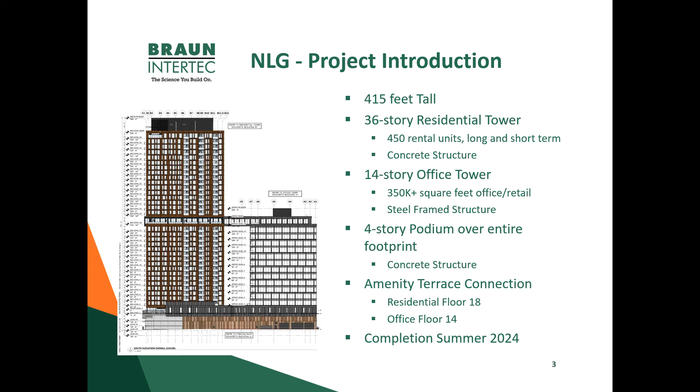Project team: the owner is Hines. For those of you who aren't familiar with Hines, it's Hines with an S, not the ketchup moguls with a Z. They are a very large global developer, in 30 countries worldwide, one of the largest in North America. I think I saw they have 160 billion dollars of real estate assets in North America alone. So they are a very big entity. They're not as big in this market, but they're a pretty big time player on the global scale. This is their third project in the cities. They bought a huge piece of land and this is their third building on that site.

Architect was ESG, structural engineer was WSP out of Chicago, civil engineer was Loucks, general contractor was Kraus-Anderson. Foundation contractor was Bolander, concrete was done by Northland. The post-tension concrete on the residential tower is Kelleher, and the steel erector is Ames. So just kind of an overview of who all was involved, who built the thing. Really good A-team, makes a project go really well when you have a team like this involved.

Our services performed: we started working on this job in 2019, so we've been working on this job for 5 years now. We've done all the geotechnical work, 3 rounds of borings, plus some additional testing, environmental phase 1s, phase 2s, wraps, all of the environmental.

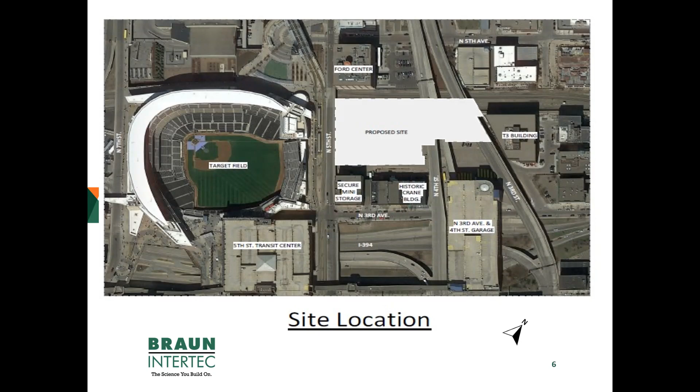Site location, as you can see, Project North is going straight up, but actual north is going like this. For purposes of easy plans, everything was done by Project North and kind of skewed just a little bit. So you'll see this, it's not quite north, but this is the way we looked at the site. It's right next to Target Field, crammed right in between 5th Street and 4th Street, with overpasses in the middle.

And then at the end of the day, you also have this lovely Bassett Creek watershed and the tunnel that runs through the site.

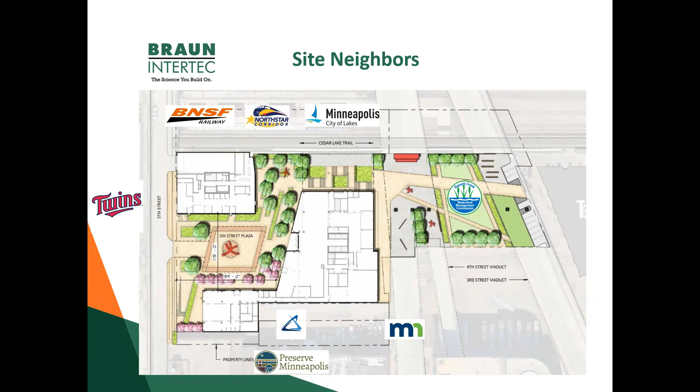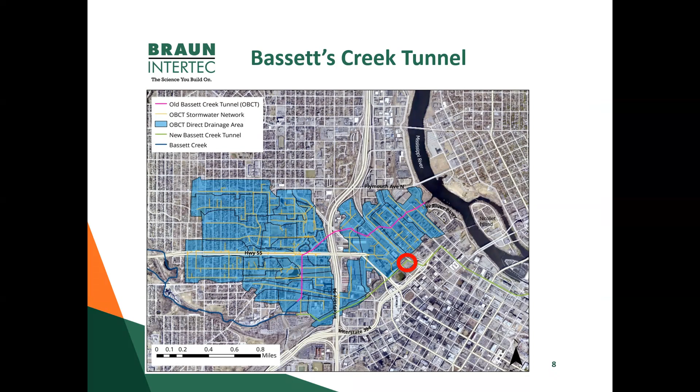This is where the tunnel runs through the site and under the building. This tunnel is 14 feet in diameter upstream. We've got a drop structure right in the middle here - upstream it's a 14-foot diameter culvert, downstream it's an 18-foot culvert, with a 23-foot vertical drop at that point. The tunnel runs along at a top elevation of about 807, drops 23 feet, and then keeps running as it continues on to what we'll call Project East.

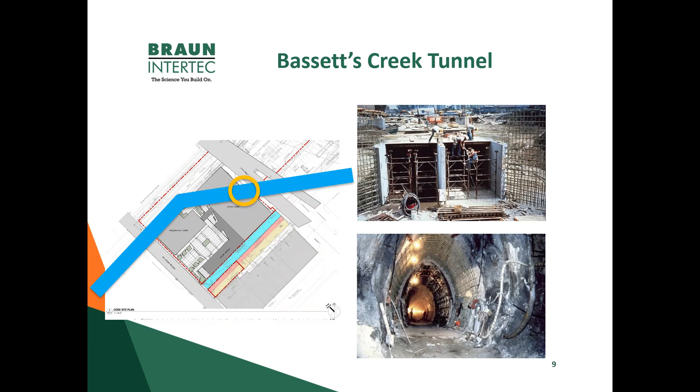So yes, that's a challenge, obviously a known condition going into the site, but on top of all the neighbors, they also have a huge tunnel running under the building.

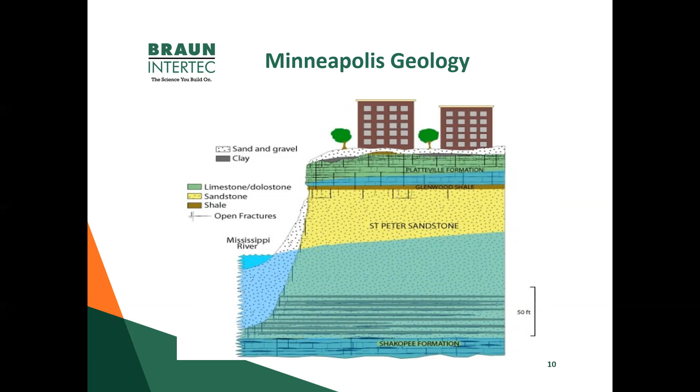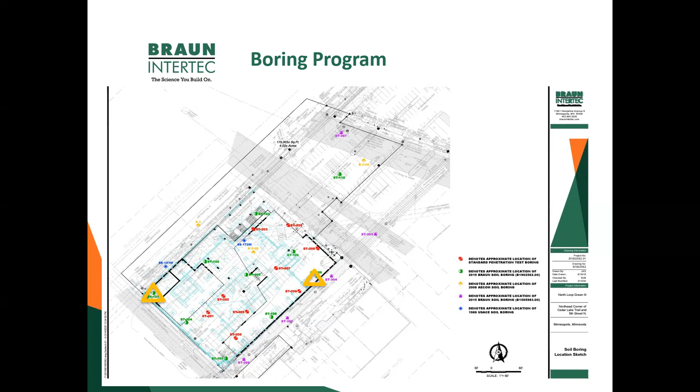We did conventional SPT borings, pressure meter testing, and had a whole variety of evaluation techniques. Then we got these two borings on each side of the site that I'll pull up for reference purposes. We're not going to go through the whole boring log report, but we'll hit a couple of them.

On the west side of the site, we hit the typical urban fill, and then we had all these fat clays from the alluvial deposits, very soft, going down to depths of about 50 feet. Bedrock on this side is at about 115 feet to hit sandstone.

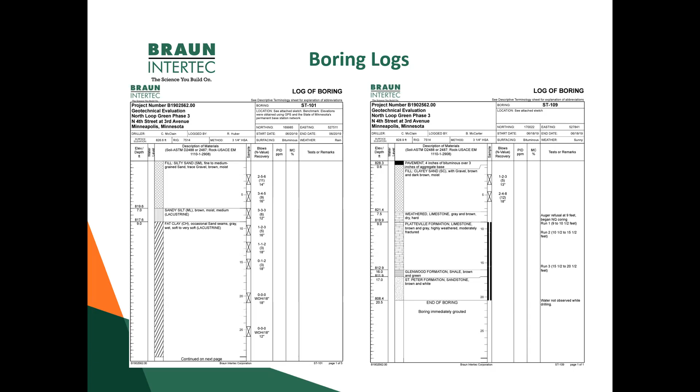Moving over to the east side of the building, you've got urban fill, limestone at 9 feet, and St. Peter sandstone at 17 feet. So right off the bat, we knew we had some really challenging conditions changing dramatically. Below the fat clays, at least we have some nice sands, but one side of the building has really shallow bedrock, while the other side is 120 feet down to get to bedrock.

So I drew up this beautiful cross section, cutting the site from west to east. You can see you've got the typical urban fill layer at the top. On the east side of the site, you've got your limestone and shale, and then St. Peter sandstone just dropping off into oblivion. As you move across the site, we have a nice pocket of sand kind of in the middle, but then you've got these very soft clays over about a third of the site on the west end.

At depth, we've got nice glacial soils, with a lot of cobbles and boulders, which makes you start looking at combination piling systems. These are going to be challenging for pile installations because they created a lot of issues—our drillers loved trying to get through this at 100 plus feet deep, with cobbles and boulders, and we had to find bedrock. They love that phone call.

So this is the typical cross section across the middle of the site, and it's pretty similar to that generalized geology map, except this is a relict Bassett's Creek channel versus the Mississippi River.

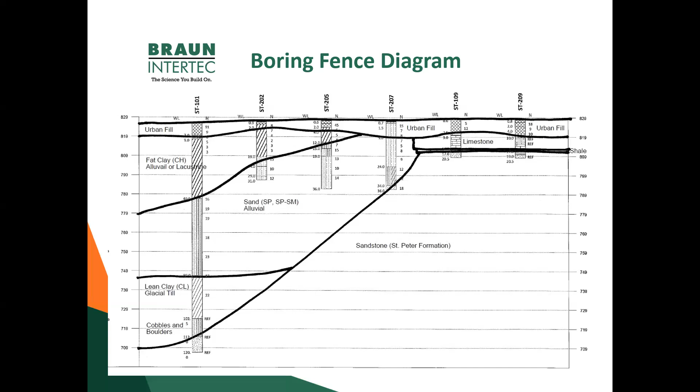So, the foundation system—given all those variable conditions, we end up with basically everything you could imagine putting under this building. Here's your residential tower, here's your podium, and you can see the tunnel down here in this picture.

We ended up with a combination of H piles, pipe piles, cast in place drilled shafts, spread footings, more H piles, and we'll get into it later, but we had to switch some to micro piles. So we've got all the different kinds of foundations you can imagine. Our H piles are high capacity, 300 working tons, HP 14 by 117s.

The contractor or designer ended up on those for their load carrying ability for the high loads, combined with hopefully being able to penetrate the boulder layers at depth in areas to help with drivability.

The pipe piles where we used them are just conventional 12-inch diameter concrete filled steel pipe piles. The cast in place drilled shafts had a 3-foot socket into the sandstone with anywhere from a 3 to an 8-foot diameter. We had spread footings throughout the central portion, and based on pressure meter tests and our borings, we used 8,000 PSF for the central part of the building spread footing.

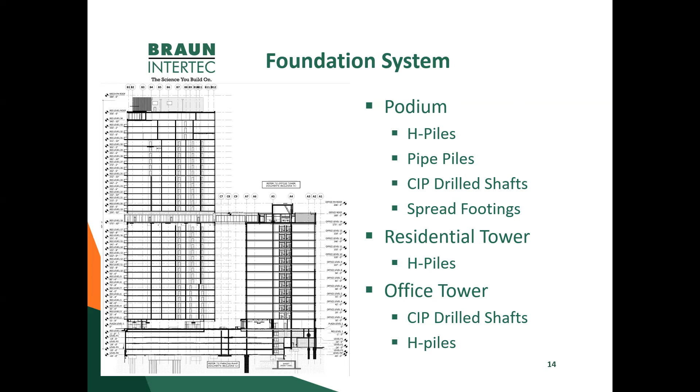Our primary H piles were in this area—this is our residential tower with kind of this west leg of the structure, because that fat clay zone is basically running right through here, as you hit that really deep zone of very soft clays. This is kind of the highest loads with the biggest part of the tower. You can see the elevator core here—that's a lot of 300-ton piles driven in a pretty small area.

So the blue is our office tower. You can see most of it is under cast in place drilled shafts, anywhere again from about 3 feet to 8 foot diameter drilled shafts. This is the elevator core for the tower.

Basically taking up that whole eastern half of the building. And then the central part where it was just the podium, we were able to chase out those fat clays in areas and put the spread footings right on the nice sand. Once we got down to basement grade, we had spread footing pads under this central portion of the building, with some on native sand, some on soil corrections.

Patrick was out for much of that part of the work. So again, when you've got pile rigs and caisson rigs going on either side of you, it's kind of funny to be doing a soil correction for a spread footing right in the middle.

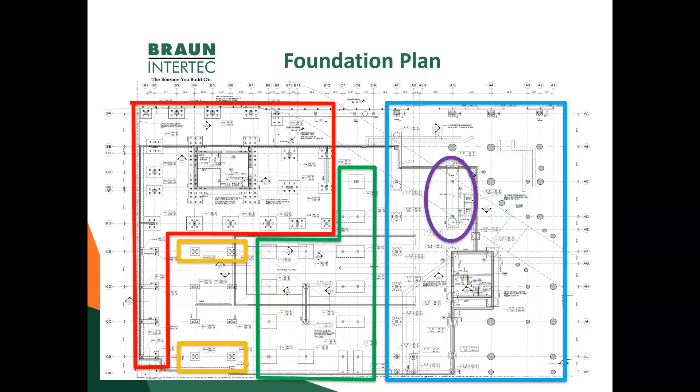So since I made some noise—I mean, that looks like the airport where we put the light rail and then they build a parking ramp over it. And so CNA and other people had to figure out how to build a parking ramp on top of a tunnel, but it's the same stuff. It's pretty cool. I mean, we can do some pretty ingenious things when we put our minds to it.

But this vertical drop structure on the second floor of the podium, they have an access room that they can get into to do cleaning, to do maintenance. We sent people down in this tunnel multiple times throughout the project to do inspections.

We'll touch on that here in a little bit, but before this site was built, it was just a parking lot with a vault cover on the top. And you could go out in the parking lot and stand on it, and it sounded like you're standing on top of a waterfall, because it's basically just a constant flow of water going down and dropping 25 feet. And it was kind of eerie when you realized what was underneath you.

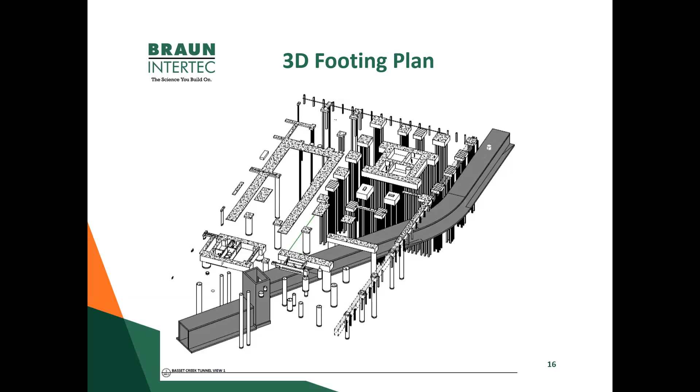You can see the tight confines of everything they were dealing with. Even for an urban site, it had a lot of challenges with logistics and moving things around and just working on this property. This is the retaining wall, temporary retention starting on the side by Target Field.

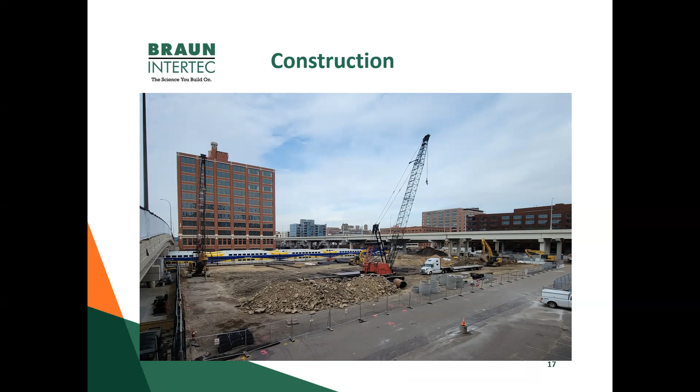This is looking back the other direction. You can see the bike trail - maintained operation throughout. They're just now putting the cover on it to protect the bikers.

The railroad tracks here, looking back - this is, I think, December 2021 when they first started driving piling. They had 2 different pile rigs working, and they ended up having a caisson rig. They had soil correction excavations. There was a lot going on in this little piece of the world for about 12 months.

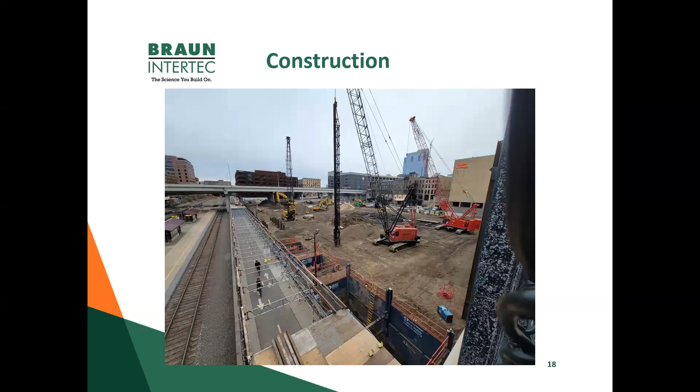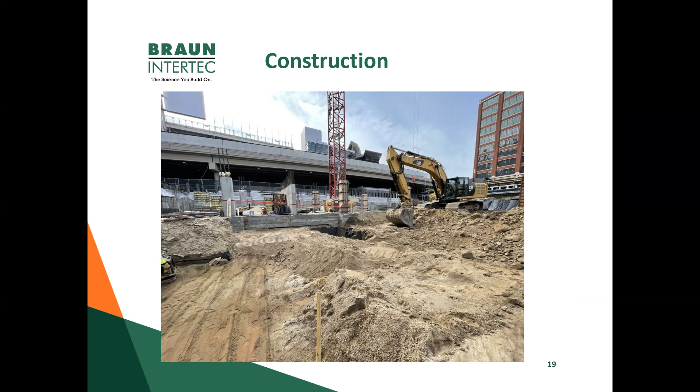Here's some excavation work - as you can see, these grade beams were substantial, anywhere from 6 to 8 feet thick, for the pile caps and grade beams of the residential tower. You can see we've got our pile caps in, and excavation work. This was part of the soil correction in the central part of the site.

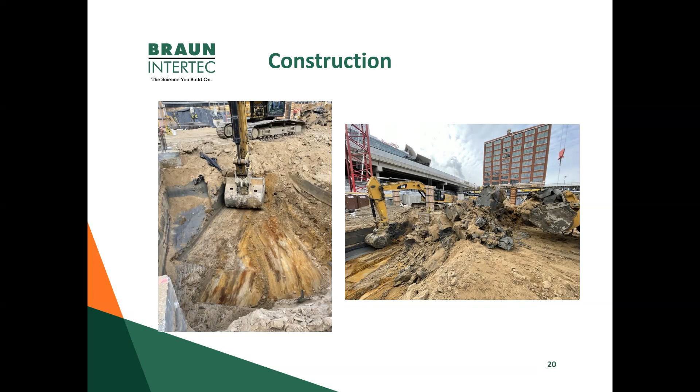Here's a couple of pictures Patrick took. You can see it was about as night and day when doing an excavation - you've got your fat clays on one side and nice sand on the other. You can see the transition - correcting out that very sticky, nasty clay was pretty easy when you've got that stark a transition between conditions.

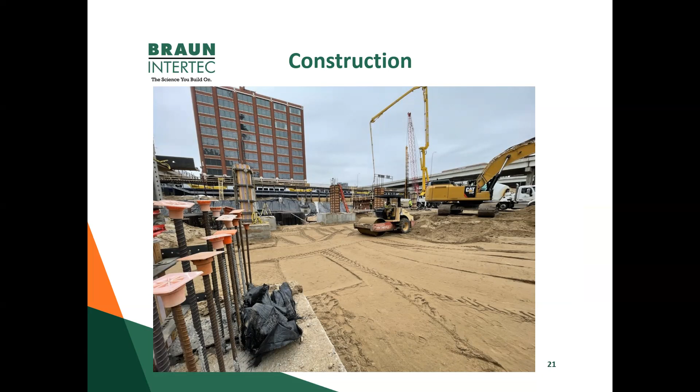This was just some backfilling going on. After the corrections are done in the middle part, you can see columns going up, pump trucks, still have pile rigs, and caisson rigs on the other side. You've got excavators - it's pretty remarkable they were able to operate all this stuff at the same time in this one little area.

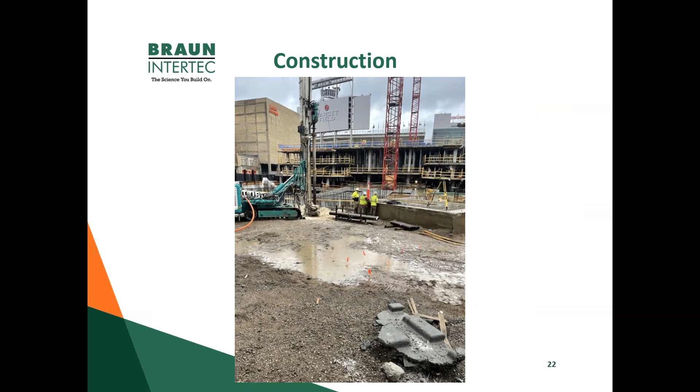This is a micro pile rig. As I mentioned, some of the piles ended up getting switched because of groundwater challenges with some installations, so there were areas where they actually switched over from drilled shafts to a micro pile rig. These guys look like they're looking at something really intense - I wish I knew what it was, but they're definitely focused on something towards Target Field.

This was the tower going up. I've got a bit of a lag because we get involved with foundation work and then we're not there as much, but this was the site - you can see the office tower going up. This is 4th Street, that's our major elevator core in the middle, and that's the residential tower with the PT decks going up in the background. This was probably December '22, I think.

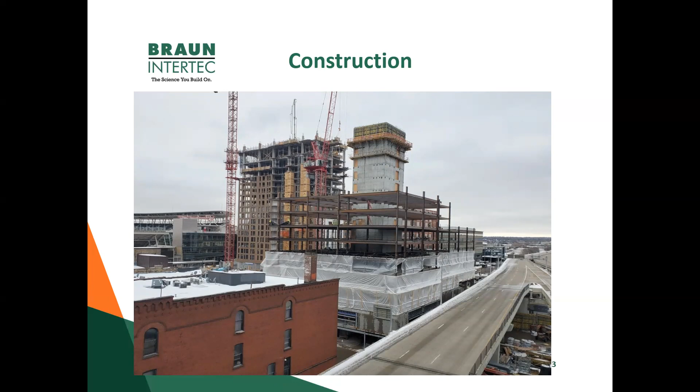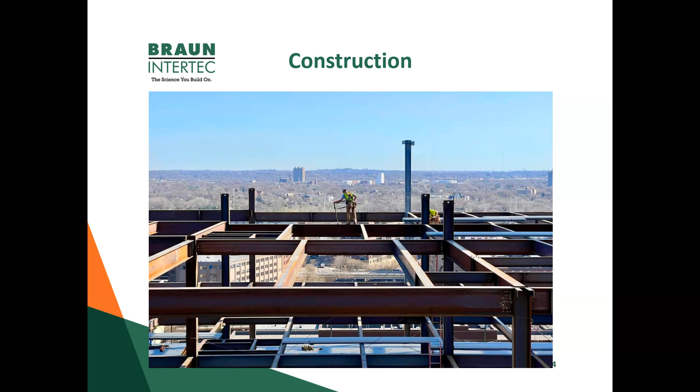This was a steel worker, Dan Graham, our steel guy, who took this picture. I bet he takes a lot of really cool photos that we never get to see. It kind of makes me queasy because I'm moderately scared of heights, so just watching these guys walk around is pretty incredible. But this was just the steel going up for the office tower - the work those guys do is great, and I just love seeing photos of them.

So that's where I think we should do our next meeting. Let's go. 2025, let's go.

So a couple of construction challenges. Again, this was a really big job, a lot of moving parts. Overall, it seems like the construction challenges were pretty manageable, but there's never not hiccups. There's never not something that goes on.

One of the things I would say was the Bassett Creek tunnel inspections. The city required inspections to be done before, during, and after construction. We have not completed the last one yet. We've been in the tunnel 5 times so far. They also required us to, which is a good thing from a safety standpoint, have a life and safety consultant, which I didn't even really know was a thing. But we had to have rescue and EMS personnel on call while we're in the tunnel.

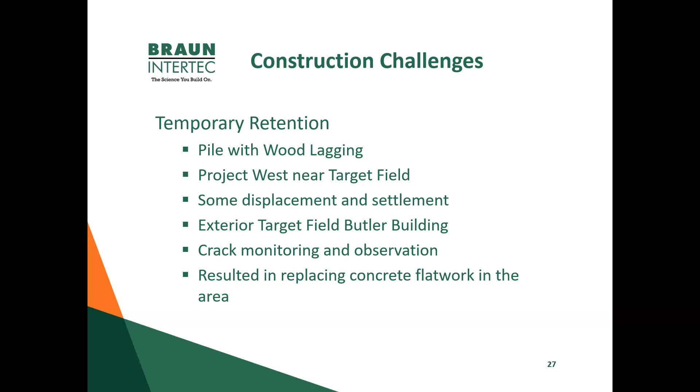Another thing at the start of the job, we had some low strength concrete that threw a huge curveball at our structural engineer. There were some columns and walls within the podium. My understanding, it was kind of a new green mix concrete and it had a hard time. It did not achieve long-term strength, and it was 6,000, 8,000 and 10,000 PSI mixes. So when you're talking about a 40-story tower and high strength concrete in the core, it's a big deal.

So the structural engineer ended up modifying the cylinder pattern. This was the first time I'd ever seen this, as far as the number of cylinders we had to get. We went from 5 sets to 12 sets, so from 5 cylinders to 12 cylinders per set: 3 day, 7 day, 28s, 56s and 84 day, plus 3 holds.

There was also coring done to further evaluate strength. Several columns had to be torn out and replaced because they just couldn't confirm long-term strength. This casting cylinder pattern continued until we got halfway up the residential tower, and the structural engineers felt good about the new concrete mixes and could pull the plug on it.

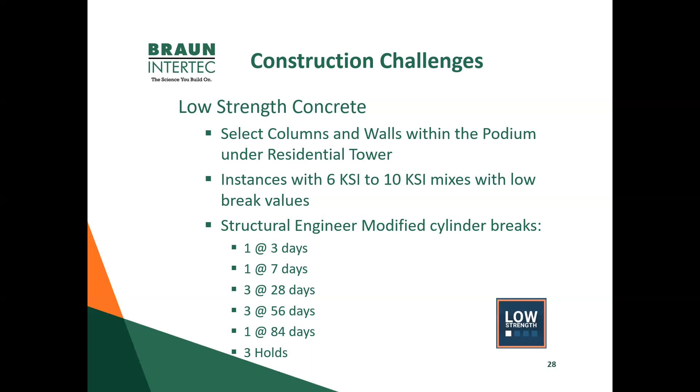Alright, so then deep foundation modifications. Again, I don't have a lot of pictures on this, but we kind of alluded to it. As they worked around the tunnel and had groundwater issues within the cast-in-place drilled shafts, the contractor decided to switch several of the shafts to H piles and a few to micro piles, basically at even cost, just because they were having a hard time in the sand, having problems getting them to depth, and they didn't want to mess up that tunnel. So there were some pretty substantial changes.

I want to say there were, at the end of the day, like 15 of the shafts got switched over to H piles. That was a pretty big change. They were right along the tunnel, just to aid with constructability and to avoid any potential impacts. Again, it was kind of a contractor-decided decision - if they could get the same capacity and do it in replace of the drilled shafts, then it seemed fine to us.

Just on that thing, what was the cost? So the trade-off cost-wise was that the contractor said, this is a smart thing to do, there's no cost impact.

That's where the conversation started, I don't know where it ended. There were some later follow-ups with Kraus Anderson and the owner regarding the delta, but we went into it with it being an even trade, and it may or may not have ended up that way at the end of the day. I don't know how that ended up, so I don't want to allude to it too far.

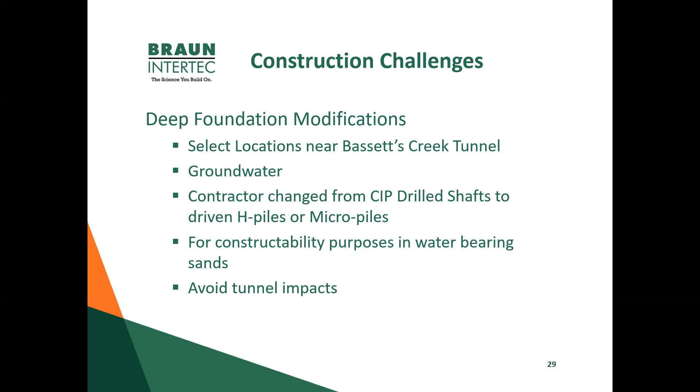In Minneapolis, we've done some work downtown and they've always been sensitive to pile driving because of the noise and vibration. No, we didn't get a waiver for that on this project. We had vibration monitoring, but we didn't have to do noise monitoring. That was Ren's baby for a long time, but yeah, they definitely had a concern about it. We didn't have anything that was concerning though.

For stormwater management, when you look at where to put water in the city, thankfully between the 3rd Street and 4th Street overpasses there's a nice big pocket of sand. So for the T3 building and North Loop Green, we buried underground infiltration chambers. Remarkably, when you've got a site that's half bedrock and half fat clay, how do you end up with sand right where you want to put a pond? It's pretty good luck.

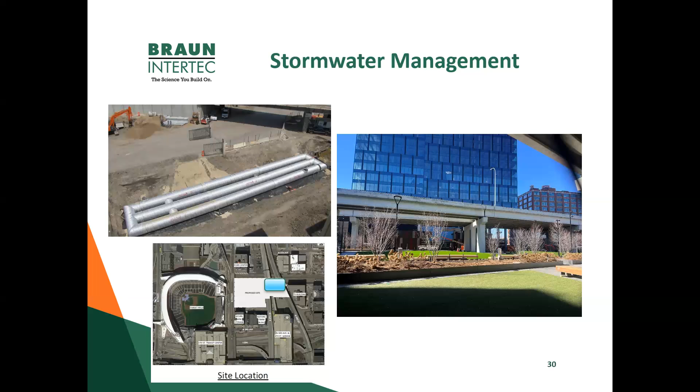As part of this, we had to prove out the overpass foundations, and MnDOT raised a stink because they were concerned about settlement from infiltrating water impacting their bridge foundations, which are on 100-foot deep pilings. It wasn't a huge argument, but it took quite a bit of back and forth to convince them it's not going to affect their bridge. There are two different systems buried underneath this part of the site, one feeds the T3 building and one feeds North Loop Green. That's probably the luckiest thing they got with all the bedrock and other challenges - they had 50 feet of nice sand right where their stormwater went.

They've got a cantilever function on the 1st floor of the building, and actually all 3 of the buildings they built through here have this. On the railroad side, the city of Minneapolis required this because the trail currently sits within the railroad's right of way. So if the railroad decided to add more rail here, they required them to put a cantilever to make sure they could put another bike trail under the building. The pilings or piers for the building had to be designed to withstand a train impact, under the slight chance they move this rail over. All the columns here are designed, I can't remember the speed, but they have to withstand a train impact, and they can run a bike trail along this corridor because all the neighboring buildings have this same cantilever. I'm not a structural engineer and don't cost these things, but I know every time you do a cantilever, your cost goes up exponentially. So they're already cantilevering over the tunnel, and now they have to cantilever for a maybe bike trail that's probably never going to happen.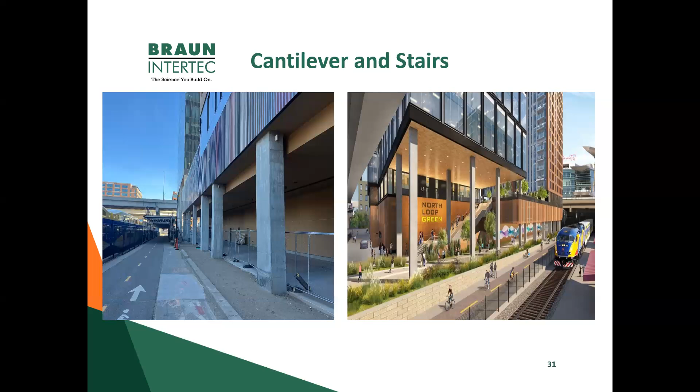This was another finished product, and you can see it's about 21 feet at its closest point to the 4th Street overpass. I don't know what they usually require, but it seems pretty tight. When you get down there and look up, you realize at its closest point it's about two truck widths away - very tight. When you look at how they went up vertically with that site, it's amazing how they shoehorned that thing into that small area.

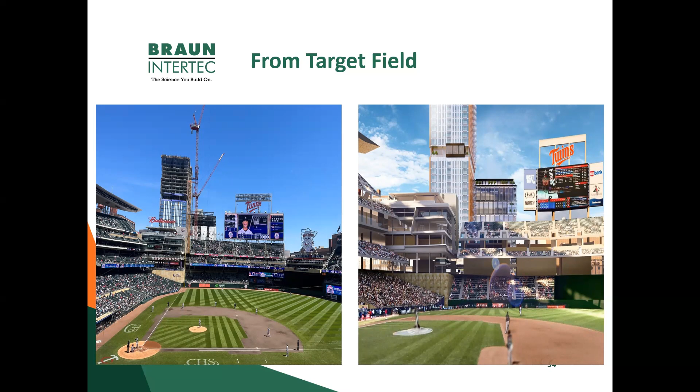This is your construction workers watching a game. You can see you got a beautiful view of downtown. I don't know what floor this is on, but it's a very nice view into the stadium. You can imagine, from the research I did, and I think I was talking to Emily about this earlier.

Anywhere from—I think a 400 square foot studio is almost $2,000 a month on a lower level, and the top floor penthouse, which is just over 2,000 square feet, super huge, is $12,000 a month. So that's the view that $12,000 a month will get you—4 months of the year you can watch baseball. And then this is the last slide I got here.

Do you mind popping the video? There's a video on that link. Can you see if it'll work? Should be able to click on it. Maybe—dramatic pause—there we go.